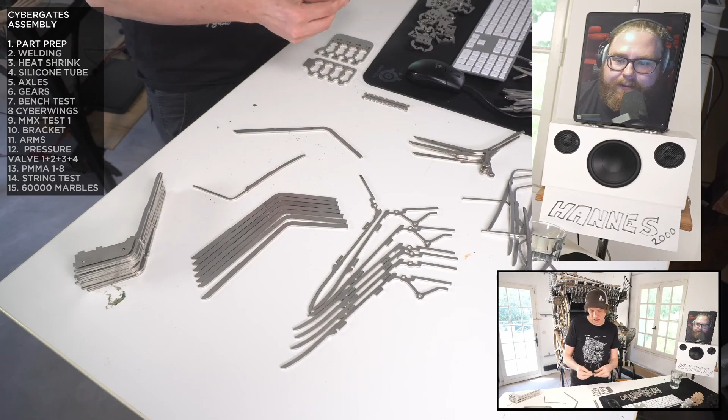So the plan is, if we look at the stream schedule up in the left corner, the plan is to have the CyberGates fully functional in the next marble test.

So yes, I'm just gonna fill this bucket with the parts that are for the Marble Gates that we're not gonna use for today.

I wanted to hype everyone up a little bit by showing you these parts again. So if we go to the close-up cam, these parts are coming later in this build. This is going to be so much fun.

So the idea is to first weld all the silver parts together, and then at the end I can add these beautiful flowers. These have all been pre-assembled.

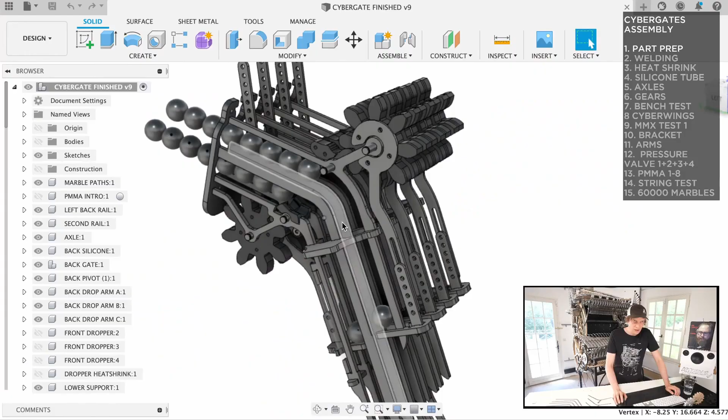So now I have to make a plan for how to put this together. And I know that my plan is to weld this part to these parts. That's the first thing, and that's what we're gonna work on in this stream.

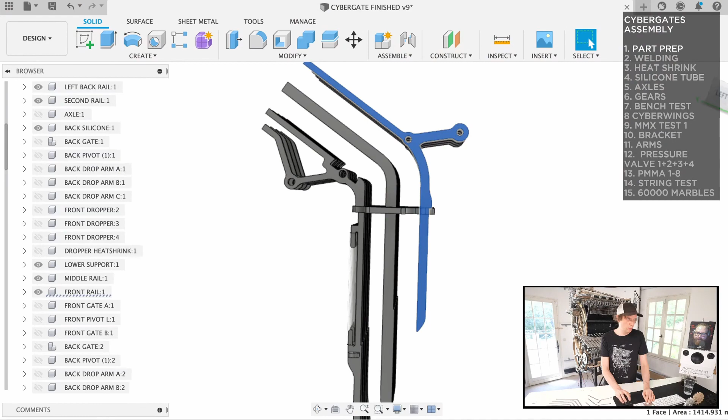So now if I shift over to the bench close-up, you can kind of see the similarity: this blue part here is this part here, and the middle part is this part. So these three parts are going to go together like this.

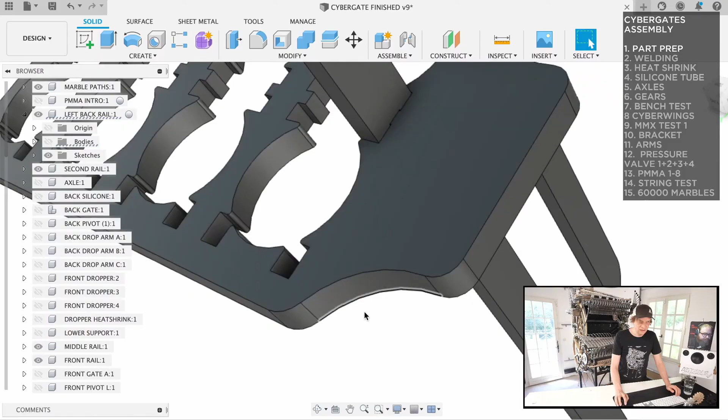Good tolerances from Monsieur Moulin in here, but there's no way of getting that part into that hole here, so I have to file away that tab.

So I'm just gonna mark everything we're gonna do. I don't know if you see there's some residue here from the cuttings. I have to file this open and make sure that this fits, so I have to file here and here.

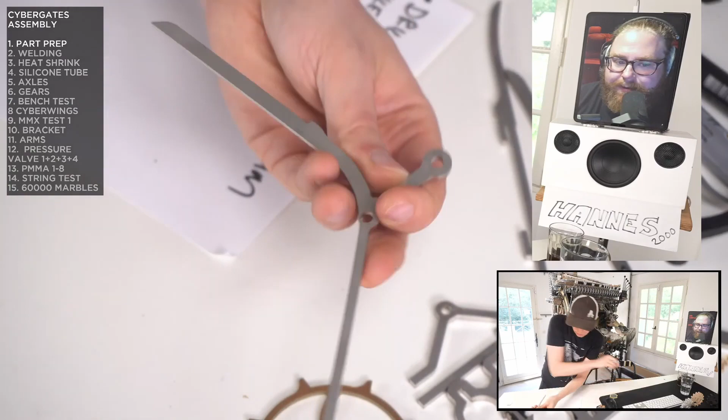And I need to do this for all the holes now before welding, because it's gonna be much harder after welding. All these holes are going to be drilled downstairs on the drill press, because these 5mm axles are not going through, and this should not be a press fit, it should just be able to go through.

And I need to keep them in when we're welding this on. Yeah, they should actually not be 5mm, I should drill them 5.5, I think.

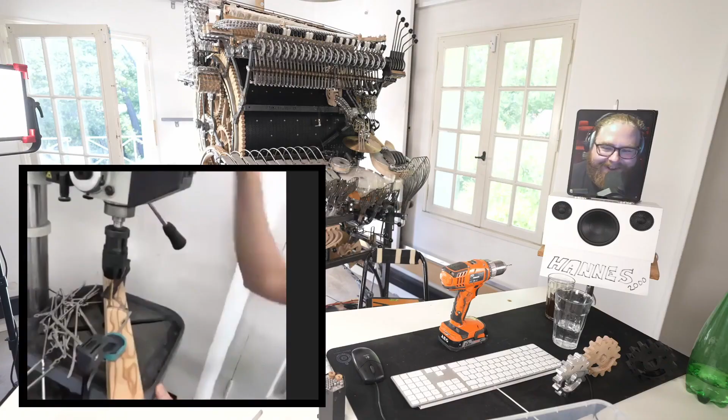Oh, that's crisp and clean. When you get this kind of spiral from the metal, you are home and dry.

That was a simple one because that was not the thin one. Here we go with the scary one.

Okay, so now I'm gonna check the fit. Oh wow, this is a very loose fit.

Yeah, so I should really not use this drill at all, let's try a 5mm drill. So if I show you, I don't know how much you see, but this is very, very oversized. But move the drill around a little bit.

This trick is not taught at any machinist school in the world, exclusively. You know what? This is my fit. This is what I'm going to do. This is the fit.

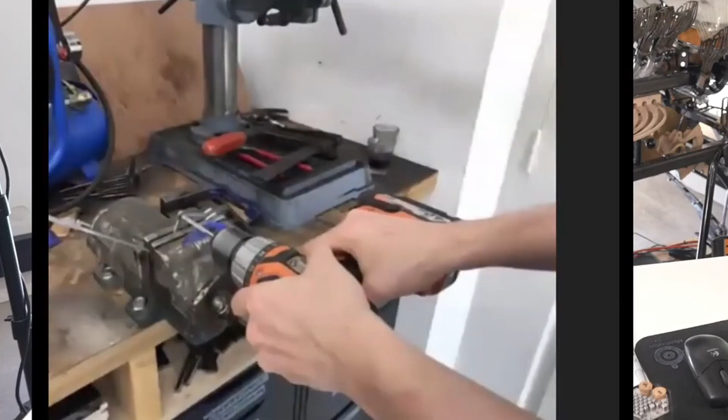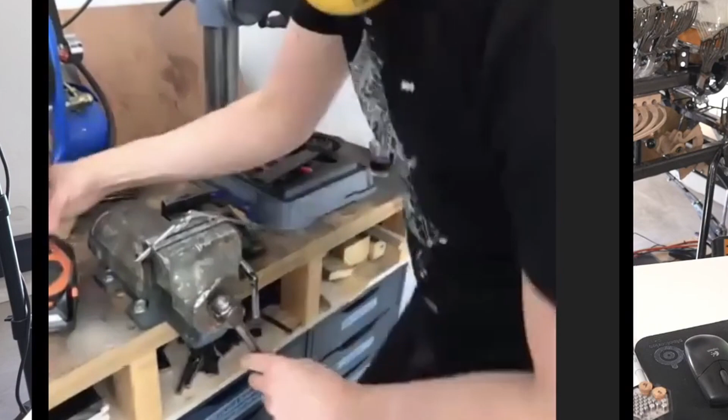Last one, here we go. We're done with the first journey to the dungeons. Okay, first part is done. Maybe we should try actually.

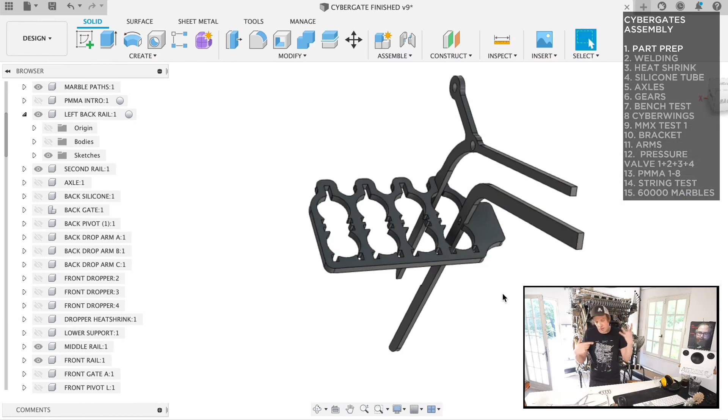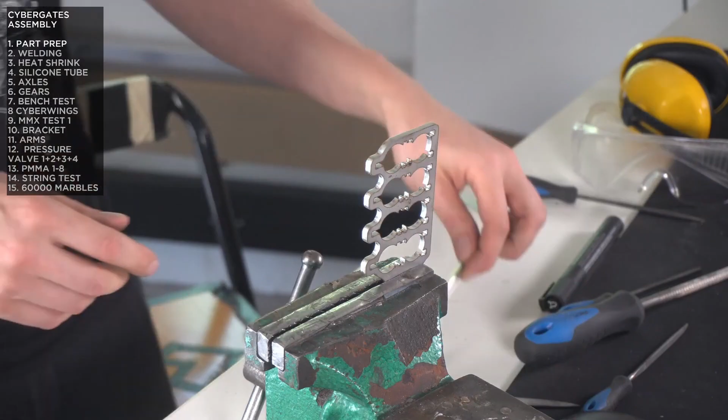Next step is to prepare this piece. File away, file away, file away. Okay, this works. So now I'm going to try to see - this will probably not work.

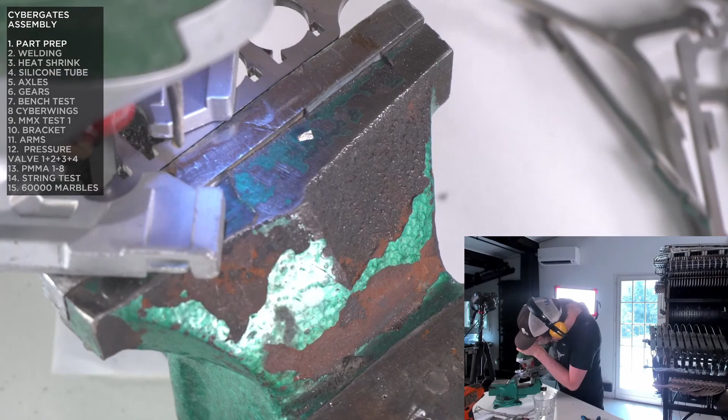Wow, it does work. This is the wrong tool, I'm gonna use the jigsaw with a metal blade. Yeah, now it goes in there.

Gonna be some angle grinding in the stream, Hannes.

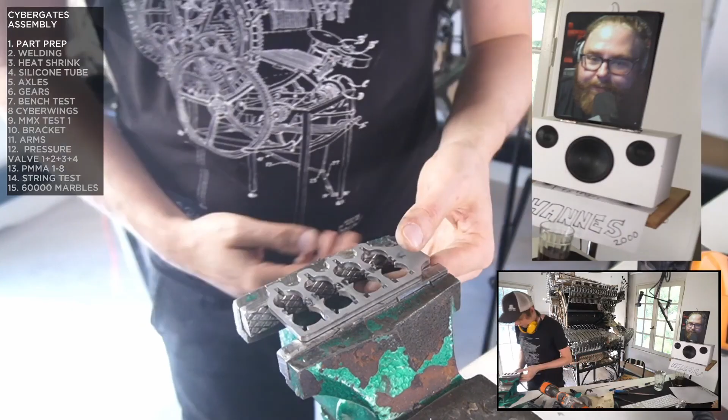As soon as you leave the room, I get a lot of singing requests. They want me to sing Ya Ya Ding Dong. Of course.

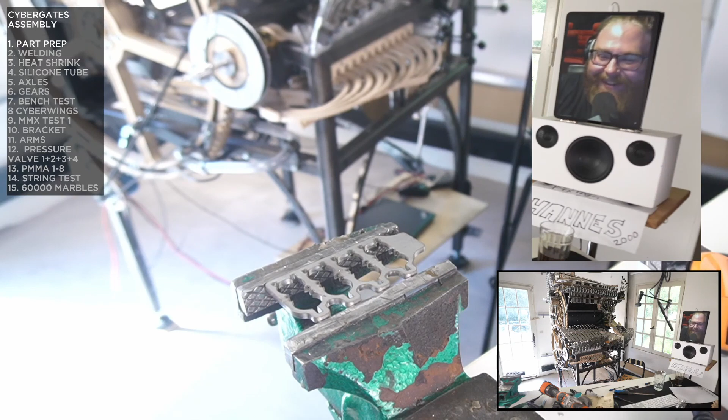Ya ya ding dong, my love for you. Ya ding dong, my love for you goes wide and strong. Ya ding dong, ding dong, ding dong.

Okay, Hannes, you take it. I don't know, no, I can't do that.

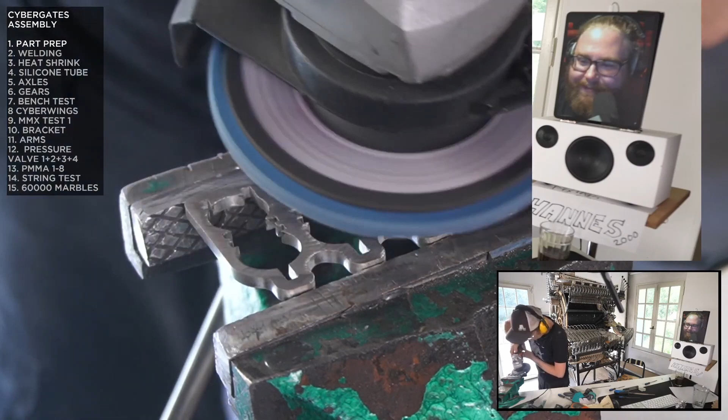Three down, three to go. Okay, we're all done.

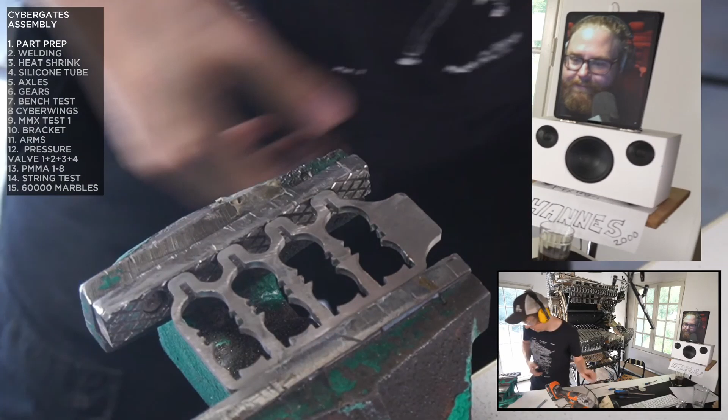I think I should file this on my sturdy workbench. It will be so much faster when I file it quickly.

Okay, so final check, I can do it in a close-up here. That one is tight, that one is not good, this one is good. This one is good, this one is good, this one is good. Are you seeing anything? This one is good, this one is good.

The two on the edges are not good, I have to open them up a little bit more. Looks good, yes, it's good.

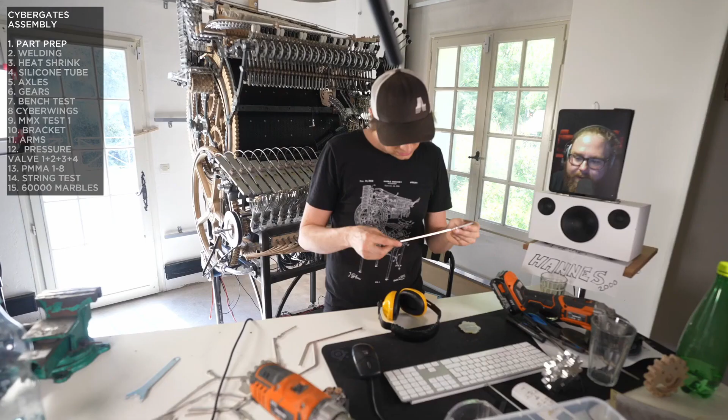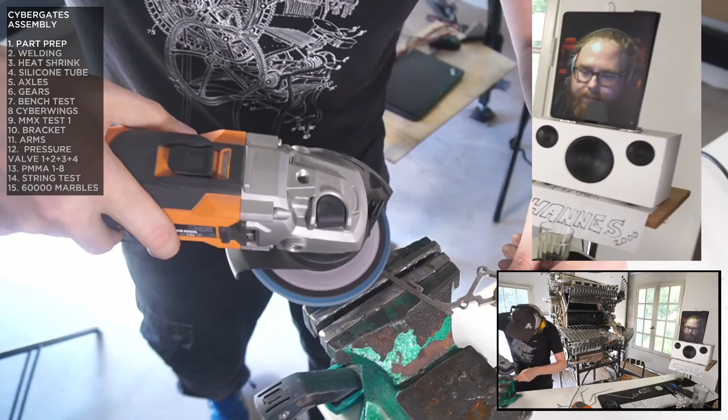Okay, I should actually lightly deburr these. It's just a light deburring. This part looks ready. I have 4 to go and then it's over.

We are getting closer to start to think about making the first welding jig, so they are ready for welding. And now I think we have to go into even more tedious mode and make a welding jig.

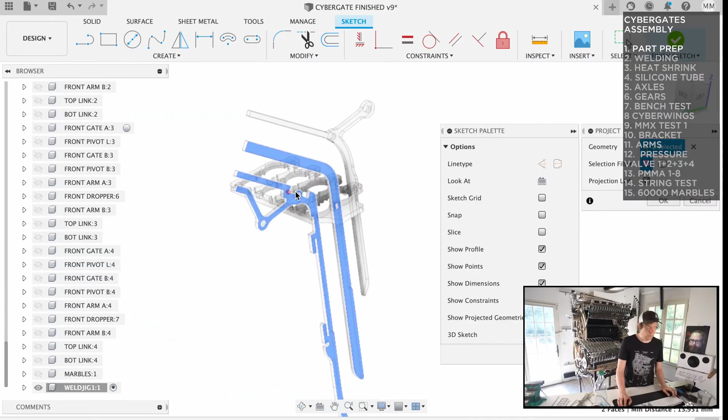So I made a sketch and I'm projecting all these profiles, and these are the profiles we want to cut into our welding jig. We also want to project this, because this is going to be a very important part of the jig. First of all, we have to decide an offset, because if I cut this to the same size, it's not gonna go in easily.

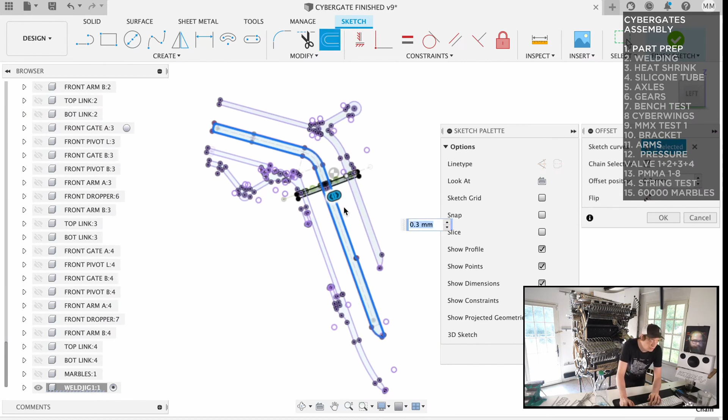So I'm gonna offset this line more than what I actually want to. I'm gonna offset it, 0.3 is enough. So if you see what I'm doing, I'm offsetting this whole profile 0.3, which means the pocket we're gonna cut in the welding jig is 0.3 millimeter wider in the X and Y direction.

We're gonna cut two plywood pieces here. Now I'm just gonna make a random shape. So this blue thing here is gonna be one plywood part.

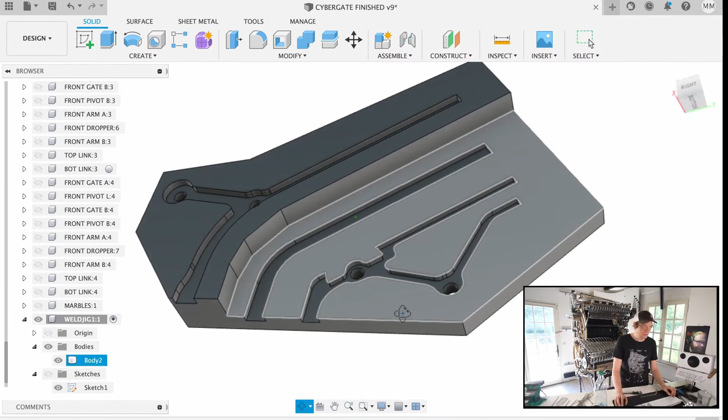So here's the weld jig, one of our many weld jigs. And the idea is that the parts will fit in, and as you can see, they fit in at different levels. So the parts will obviously fit into these pockets, the blue pockets.

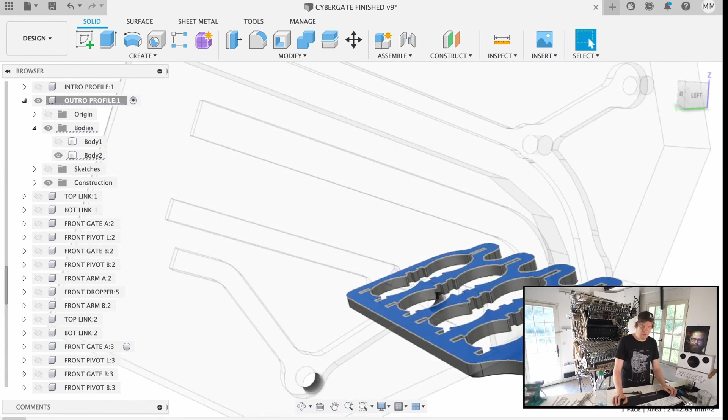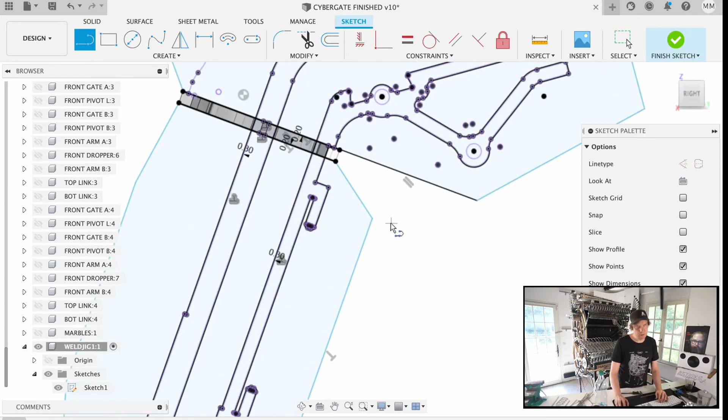I'm gonna connect these two, it's all going to be one jig now instead. But what I need to do now is save this, and I need to take away all 90-degree corners. This is called dog bones in CNC language.

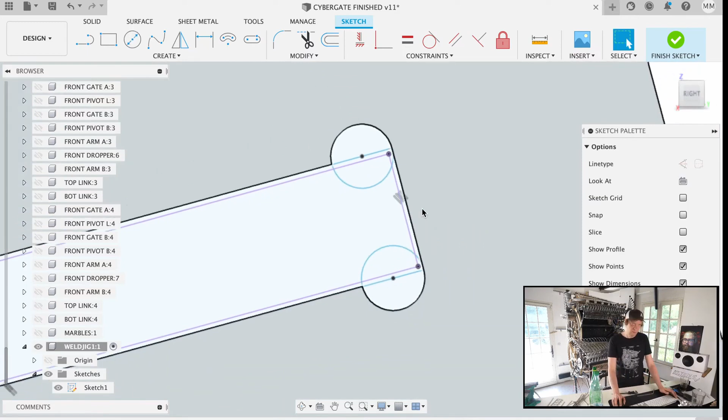I'm just doing that. But that looks right. Oh, we're almost done actually with the welding jig. So this is how the new jig looks.

So if I cut both these, I know I have a safe option. Okay, I think we're done. What do you think, Hannes?

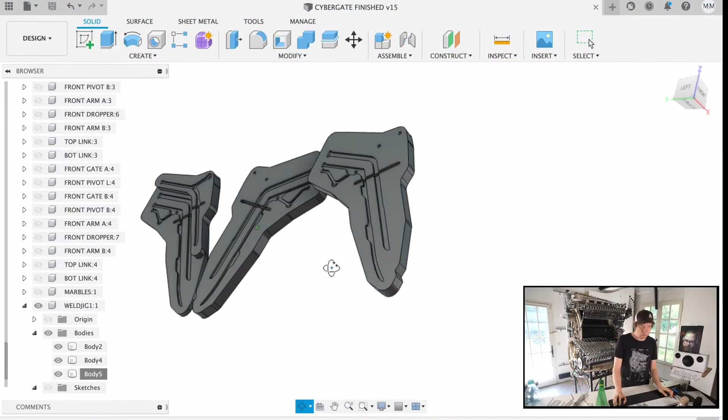Oh wow. And now we're gonna program the toolpaths, and I'm gonna take you with me downstairs and cut them on the CNC. So now I'm arranging the parts just for the CNC table.

Next thing you have to do is make a setup. This is where you're telling Fusion where your CNC machine is. And you can't just say downstairs or in the garage.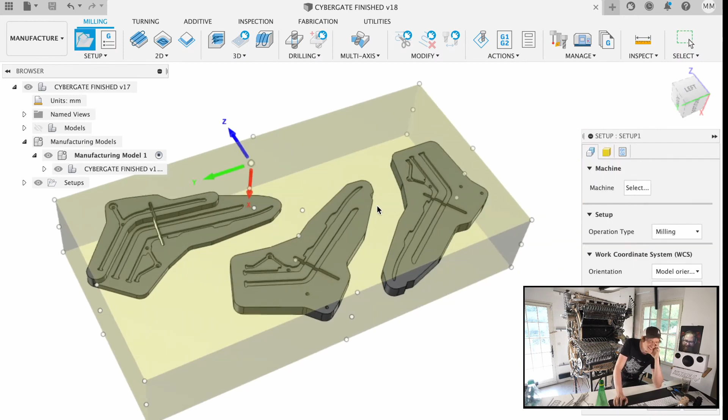So now we have our setup, the machine knows now. This is my 0 point, and the stock is 18 millimeters thick. So now the machine knows where we are.

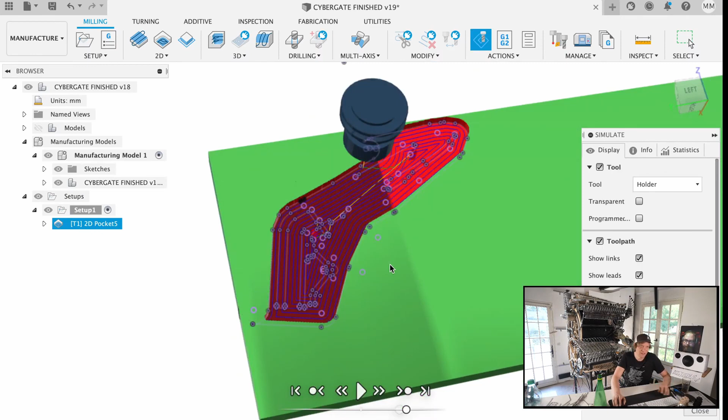I think I can cut these pieces with 3 operations. I want to start with facing this material off. Here you can see now that the tool is cutting only where I want it to cut, inside the sketch we made.

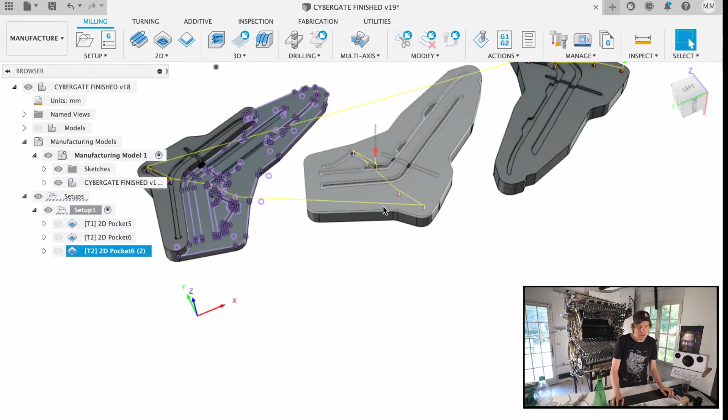So we're now going to cut 2D pockets, a lot of them. Everything turned blue, which is a great sign. So now I have the holes, and you can see the end mill is trying to make these holes. That's everything for the 2mm tool.

Now we just have one more thing to do, and that's cutting the outside contour. I'm doing tabs to hold this down. I'm just gonna finish this up now.

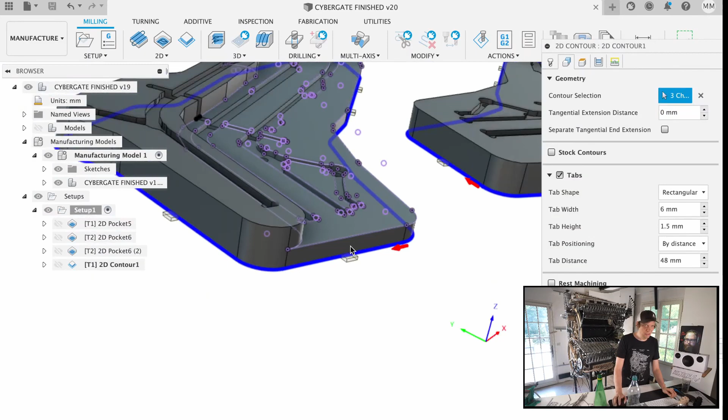So instead of screws, I'm doing these little, if you can see them sticking out like little ears. I'm gonna put them by points because I don't want so many of them, and I'm just gonna put them on the outside edges. There we have all the tabs, and I'm actually done.

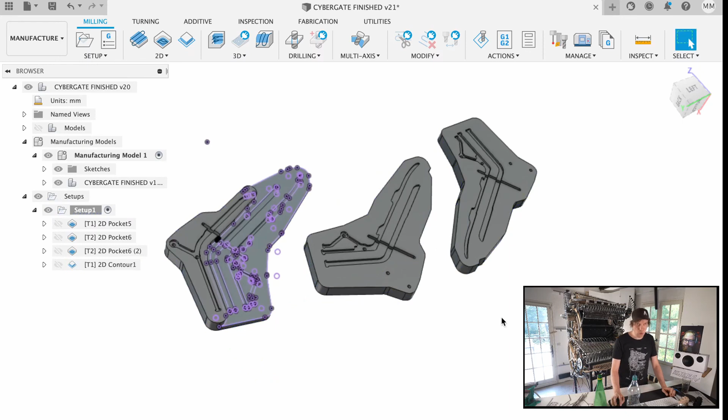What I need to do now is export it. When I name my G-code files, I try to make them structured. I start with the alphabet A, so they organize 1, 2, 3, and then I put something I can remember, face cut, and then 6mm flat, meaning a 6mm flat end. So I have all the info I need for the CNC process in the file name itself.

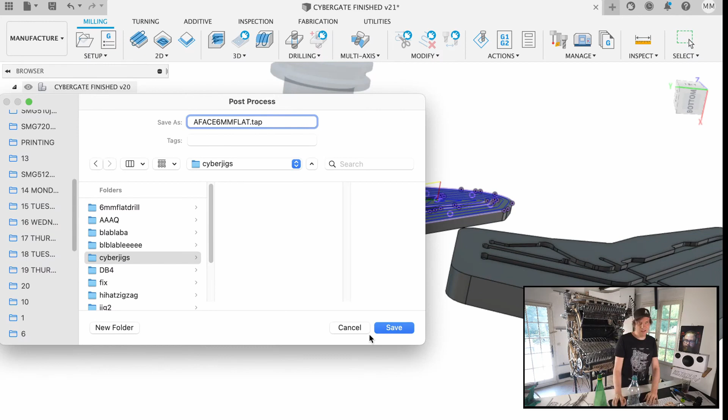B, pocket, 2mm flat. Now toolpath C, contour, 6mm, and I'm actually gonna not use the flat, I'm gonna try to use the up-down to have... oh no, I'm just gonna use the flat, I can't be bothered.

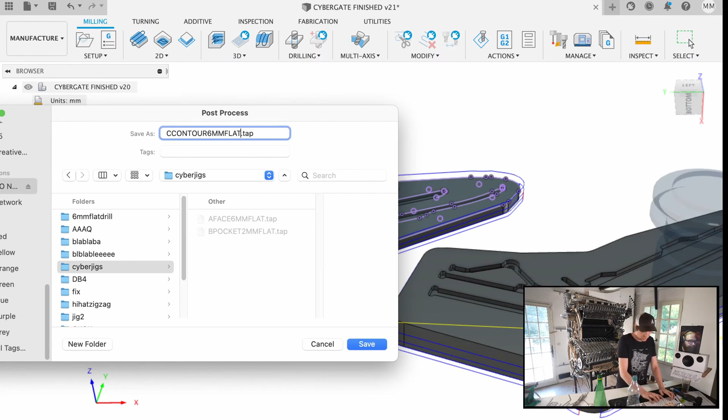Machine's alive. So I'm gonna add a flat tool. I have a ball cutter now. First step is to change to the first tool. This tool will do the face cutting.

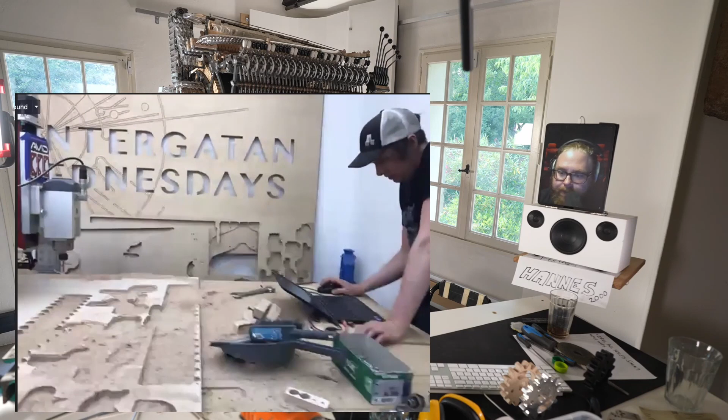Now I'm loading my G-codes that we saved so carefully. Now I'm looking in the computer, seeing on here where the parts are gonna end up.

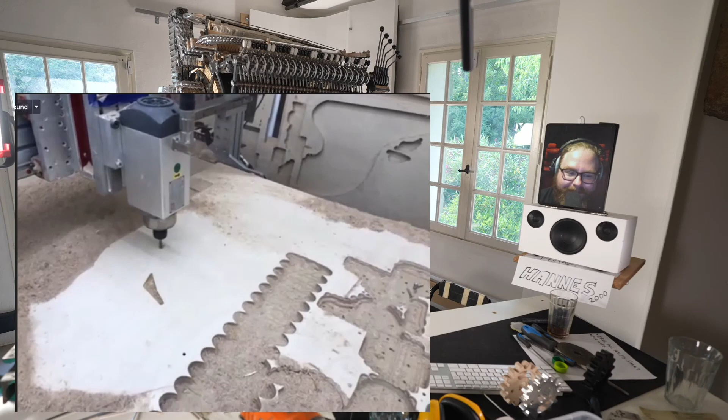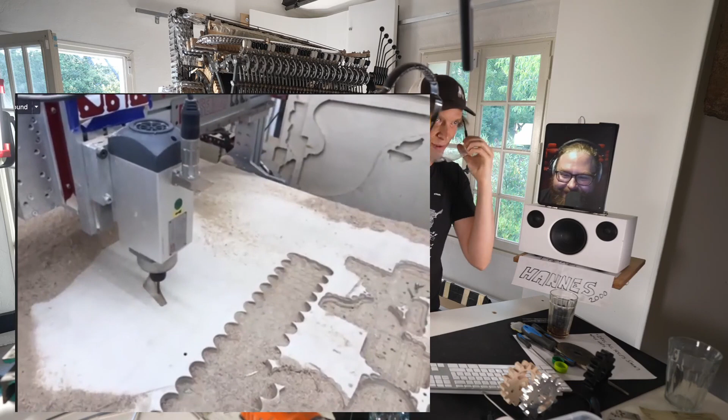Now people get to experience this in real time, not sped up like 20 times as we usually do in the video. But I'm cutting pretty slow. I forgot my headphones here, so I'm coming up for those. I can monitor my CNC from upstairs.

How fun is that? Now I can add some commentary. This is super conservative, so I'm gonna go down and override by 200% speed, so you can follow - the machine will start to cut twice as fast because it's only plywood. You can see when that happens. 200, here we go.

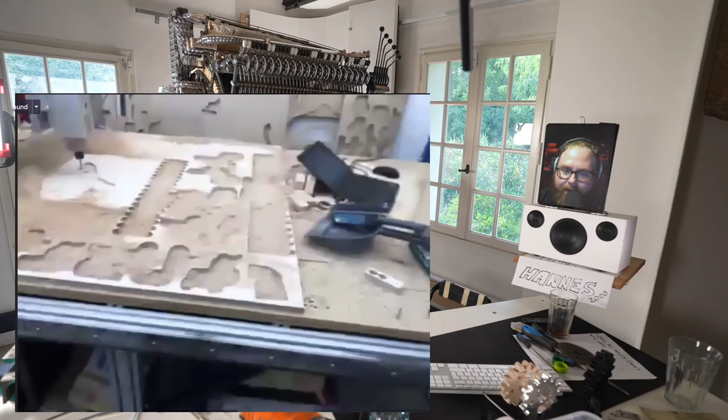Wow, that's super fast though. Beautiful. Wow. One down, two to go. Let's go, here we go, everyone.

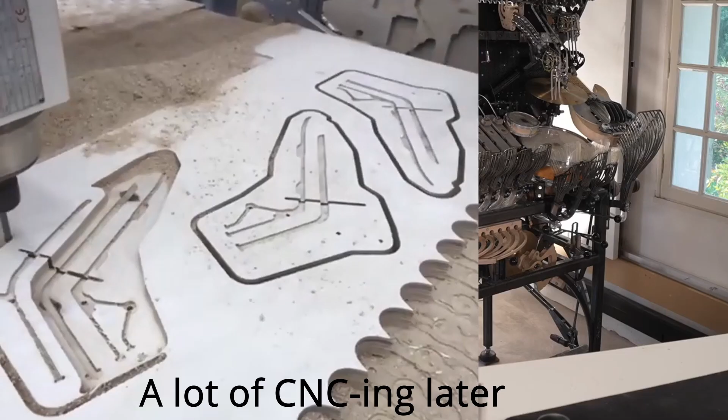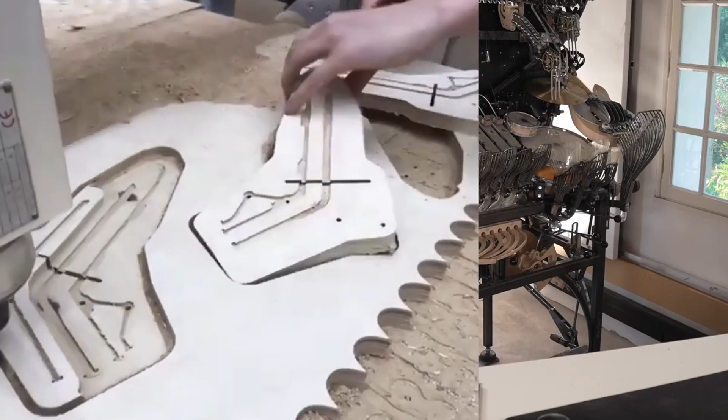Well, basically, that can happen. But yeah, look, the parts are done downstairs, right? Here we go. Okay, now we have to see if they fit.

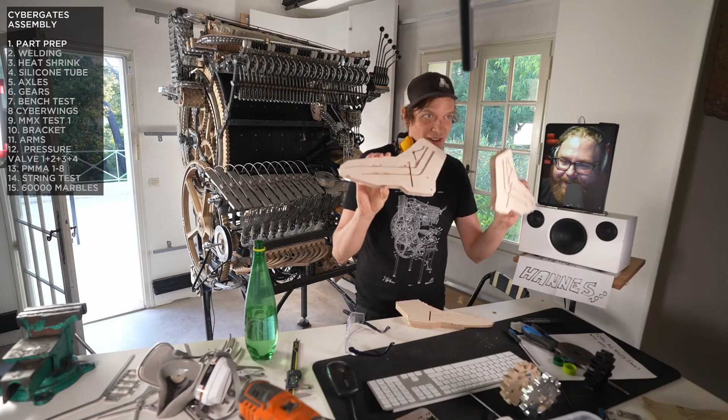First of all, I want to check if I added enough slack here, and I did. Oh, it clicks into place.

I'm gonna test to mount this with the pieces in. Check this out, my friends. I think we've done something useful.

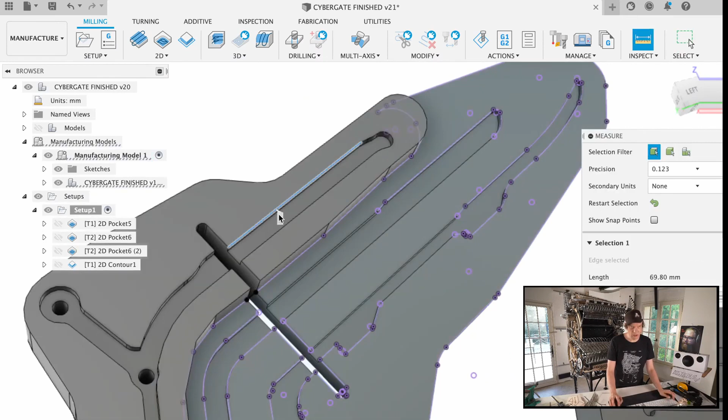5.99 - this should be 6 point. Whoa, we're so under - 6.6.

Why don't you just recut the jig? I'm just gonna cut some slots all over the board so we can push the parts out.

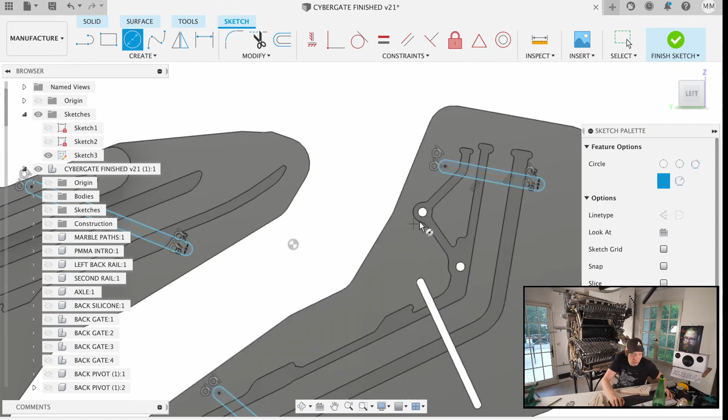Then we are gonna do the weld points. It kind of looks cool. It looks like someone has done some thinking.

I can't believe I'm recutting this. I was bullied into recutting this by chat. Oh my god, I'm so blind. That is brilliant, brilliant - we only need one jig.

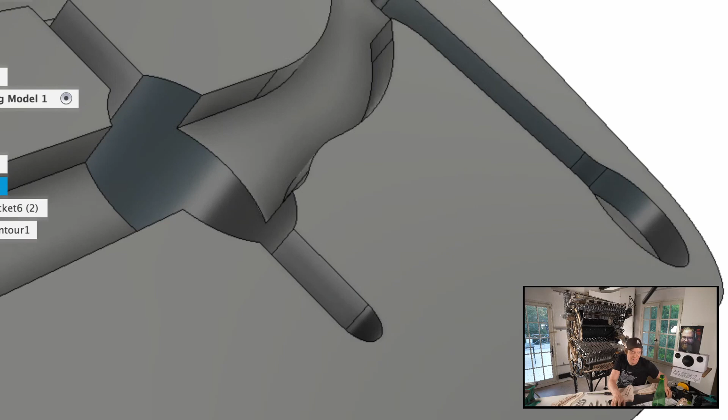Chat, I love you, because my idea was to put it like this - which is brilliant. But I would love if you could have... wait, I have it.

Safety first. This is so fun - what's happening?

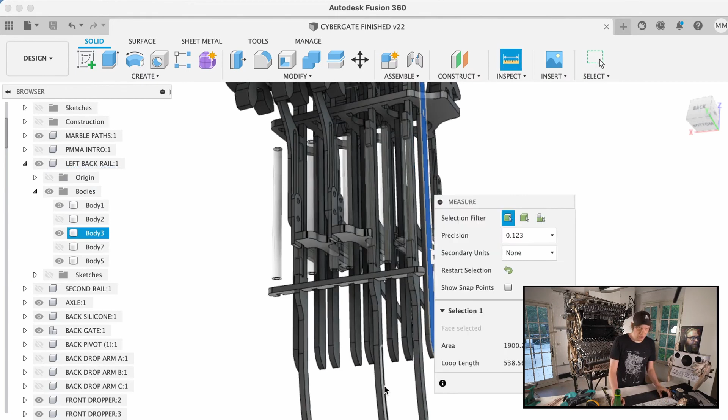We have some work to do, Hannes, with these hands. I'm gonna cut a spacer that gives us exactly the distance between the first ones we welded on and the next one here.

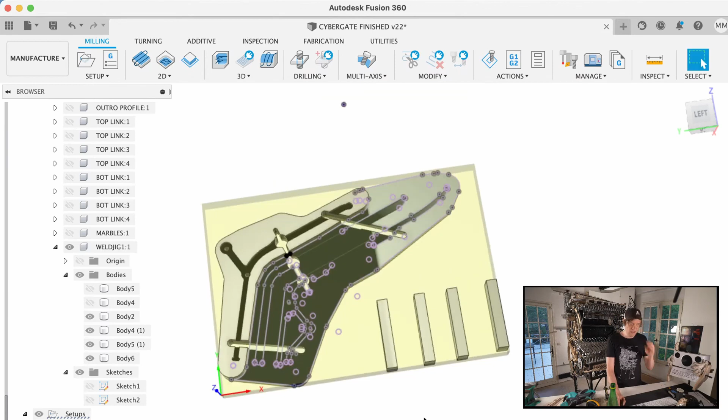10.5 - then we're gonna just make some 10.5 wide strips, so a rectangle. There we go, my friends. So these spacers make me really, really, really happy.

Okay, we have the indexing holes, we have the face cut. Yeah, that looks right, and that looks right. Can't believe I'm doing this - I got bullied into doing this, Hannes. Okay.

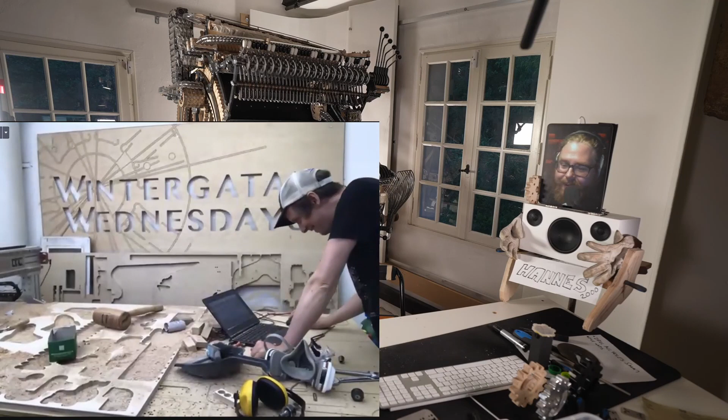We're about to make another plywood sock. Here we go, here we go. Come on now. Work, sock, work.

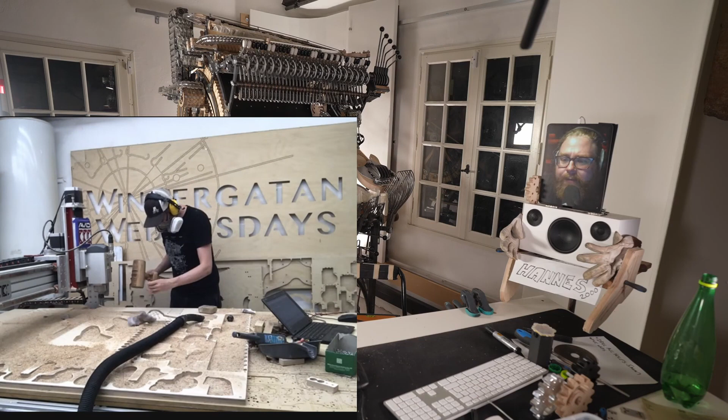And now I've been really full-time, perhaps 1.5, 2 years, I think, something like that. But I've been, yeah. So, what do you think?

Let's zoom in on this new one so we can compare. This closest to the camera was the old one, and here's the new one. Yeah, this, okay, it's very loose. No, it's okay, but this is so much nicer to work with.

This looks beautiful. So let's now start with the two outermost ones. So this is loose now. That was kind of planned.

So now, to get this 90 degrees, if I hold it against the camera like this, we just have to use something that is 90 degrees. And I actually found something downstairs.

Use an old sock to stabilize. Use an old sock to stabilize? Yeah - people are geniuses. But that's a really good idea, actually.

I wanted to get the one I wanted to show you, though. So my idea was to use like these two - they are machine cut corners in POM. They are the corners that came from the factory, so I haven't cut them.

Yeah, that was a good suggestion to recut this jig, I think everyone agrees, but the fit is very loose. Very loose, but it's actually okay.

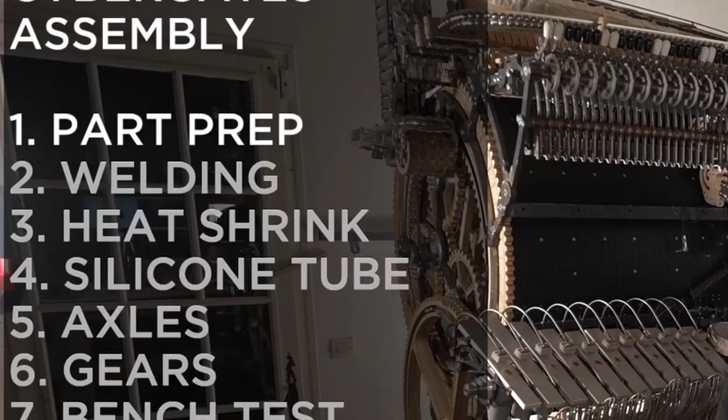Well, I think we have a very, very, very historic moment right now. Yes! Oh my! Did you see? Never thought the day would come.